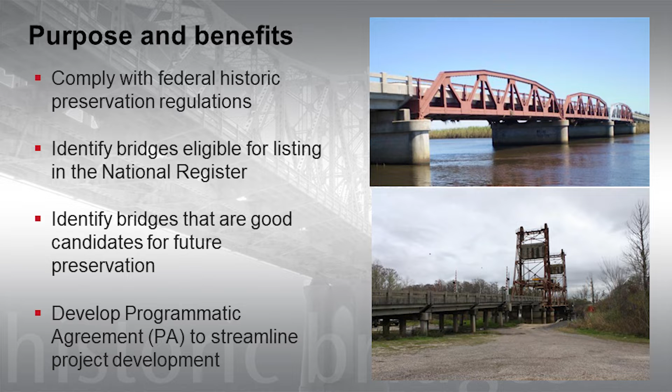What is the purpose and benefit of it all? Ultimately, it allowed us to deal with our nearly 4,600 bridges that were eligible to be historic, being 50 years and older. This agreement allowed us to comply with federal regulations, identify the bridges that could be on the register, and figure out which ones are good candidates. We had a methodology we used to select the bridges that ultimately ended up being top priority.

Ultimately, it streamlined our ability to do work on our structures. These are the project steps we went through: we did a historic context study in 2012, organized and analyzed all the bridges in that time frame, did field studies, and evaluated the register. The most important step was identifying bridges' preservation potential, using a specific methodology. Ultimately in 2015 we executed and signed the agreement with all parties, so it's been in effect now for about 6 years.

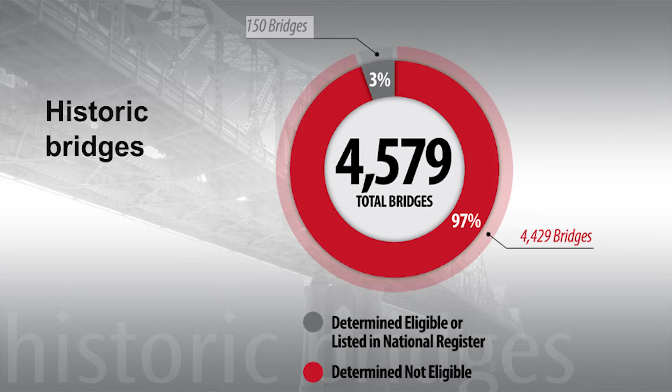Part of the methodology was to figure out what all the different bridge types are. Basically, in a nutshell, we select one bridge in each type that's going to be maintained in really good condition in perpetuity. That's the crux of the agreement. All of the others can be worked on, rehabbed, or replaced. There is a commitment on the department's side to fund and keep those bridges as a top priority.

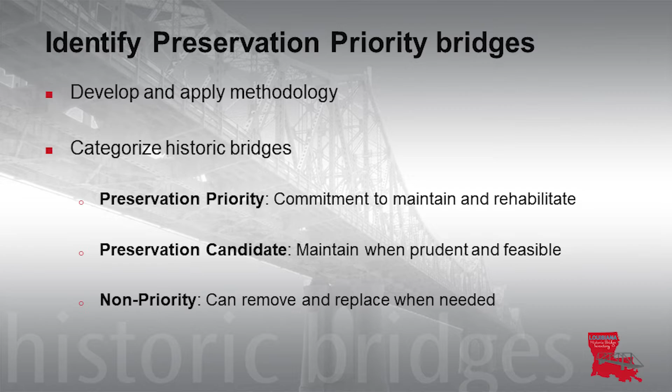One of the next steps was to identify the preservation priority bridges, develop a methodology, and categorize those bridges. The three categories we came up with were: preservation priority, the most critical bridges in our agreement, which cannot be replaced and have to be preserved and kept in good condition; preservation candidates, the next tier, which can have major rehab done on them; and non-priorities, which can be fully replaced when needed.

We used some of the NBI data to create 5 categories that went into a formula that helped us grade our bridges. Basically, we gave them a condition score, which could be anywhere from 0 up to 93. It doesn't have to add up to 100. Engineers generally understand that, but explaining it to other people doesn't always work. Here are the NBI items we used in creating these 5 different factors, which I'll talk about in more detail.

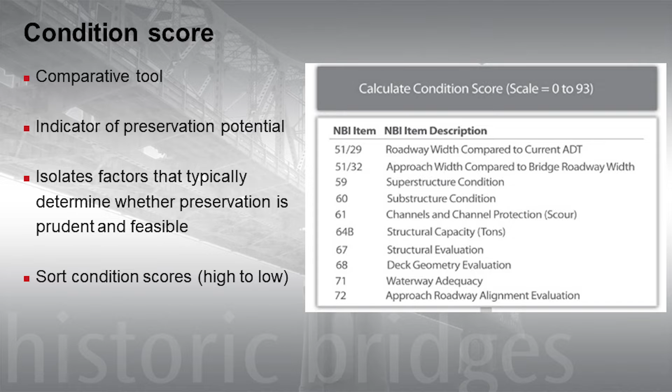It's a comparative tool. It allows us to use good data that already exists, and it indicates preservation potential and isolates factors that could create problems. We sorted condition scores from high to low, and this is how we selected the bridges that would be our top priority. So those NBI factors go into these 5 different items that make up the condition score.

Rehabilitation is the first one. Basically, is it in good condition, or can we do some sort of rehab to get it into good condition to where it would be a good candidate? Geometrics is next—what do the geometrics look like on the bridge? Does it meet current standards? A lot of them don't, but some did, and that was a factor.

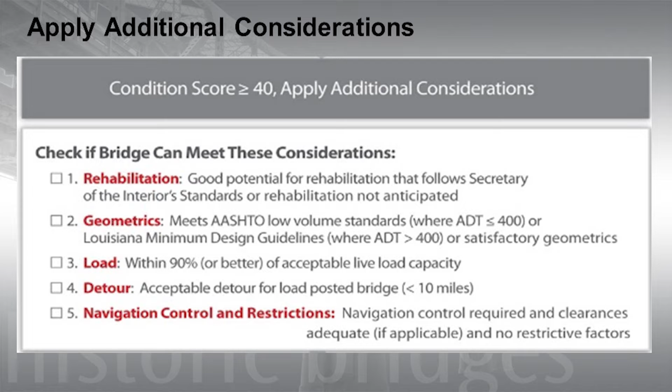So we applied the AASHTO standards. For low ADTs, we used the minimum guidelines that are allowable. The load capacity of the bridge—could it maintain 90% of the acceptable load capacity? Detour—how long is the detour? Our criteria was that it needed to be less than 10 miles. And then navigational control and restrictions was the last one. I'll go through each of these items in a little more detail.

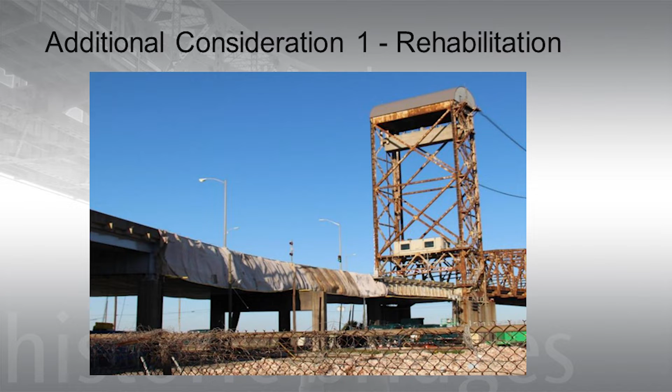So rehab—again, this is one of the bridges currently being rehabbed. By the time this rehab project is done, it would be a good candidate for being a preservation priority. This is ultimately one of the bridges that ended up on there. The other question is, if it's not in good condition, can it be made in good condition reasonably?

The second factor was geometrics—what sort of geometrics were involved in the bridge, and did it meet current AASHTO conditions? Do I have a 4-lane highway coming up to a 2-lane bridge?

The third factor was the load capacity of the bridge. Basically, can it carry 90% of the AASHTO HS 20-44? You could still have a load-posted bridge like this and have it qualify, but nothing less than this—no load posting less than this.

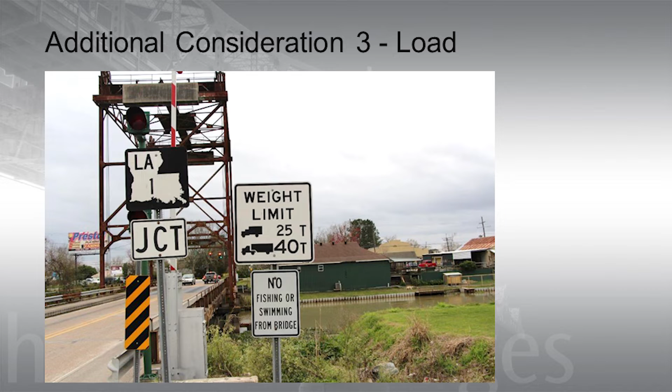The fourth condition is the detour. It's pretty simple and straightforward—it's one of the NBI items. Is it less than 10 miles?

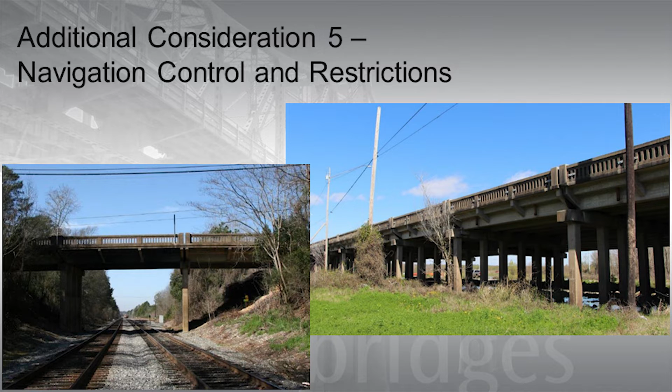This one was a little trickier—the navigational control. Of course, a lot of our movable bridges have navigational controls. Obviously, there's horizontal and vertical clearances, and as long as the bridge met those conditions, they were considered okay. You could have additional controls, such as railroads or other things, that could make rehabilitation not feasible. So all those things have to be considered.

They're all put into a formula, and we rank them from high to low. I'll note that the movable bridges, which we have the most of in the country, made up the largest percentage of bridge types in this program. Ultimately, this was the result of running all 4,600 bridges through the formulas, with 122 qualifying. I'll go through a quick example of each: preservation priority, preservation candidate, and non-priorities.

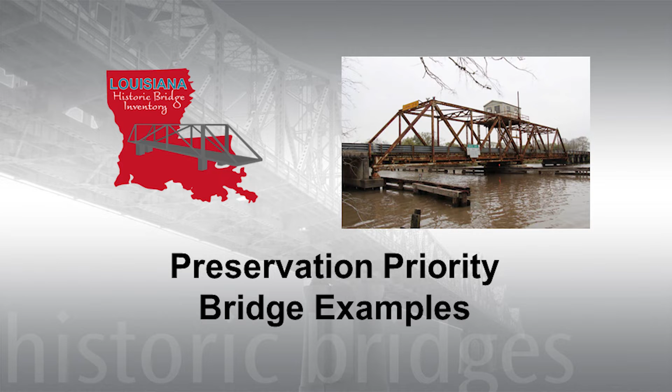This is a unique movable bridge with the operator house on top—that's very unique. Most of the time, the operator house is somewhere on the side. If you go too fast, this guy's going to get dizzy. So it needed to meet the preservation priority—it needed to check all 5 of those boxes.

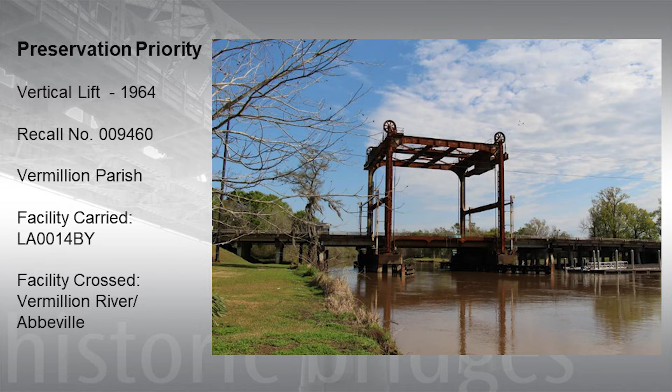Here's an example of a bridge. It's in the lower part of our state, down in Vermilion Parish. It's a lift bridge, and it's one of our preservation priority bridges. It looks rusty here, but it's been rehabbed since then. It was a preservation priority, built in '64. Here's some of the data on it—it checked all 5 of the boxes.

Conditional score was 66, so our threshold to make the preservation priority list was 40. You had to have a condition score of 40 or greater. Anything less than that wasn't even considered.

Preservation candidates, the next tier down, are bridges that can only be rehabbed, not replaced. There are very few of these, but they're included in the 122.

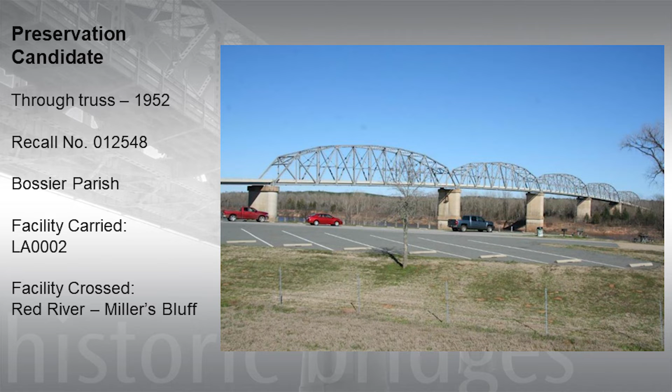Here's another example of a candidate - a truss bridge up in the middle part of our state. It didn't check all the boxes, particularly the geometrics. That's why it's a preservation candidate and not a preservation priority. A truss bridge like this, you're not going to fix the geometrics without replacing it. It's still a candidate for rehab, but not for replacement.

Non-priority bridge examples scored 40 or less. These are structures that can be replaced. Out of those 4,600 bridges I referred to earlier, 122 will not be replaced, but the non-priorities are the 4,600 minus the 122. This allows us to move forward without significant issues with Section 106 or other historical federal guidelines.

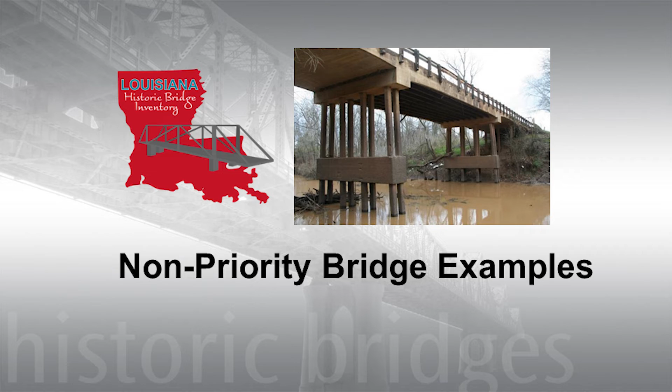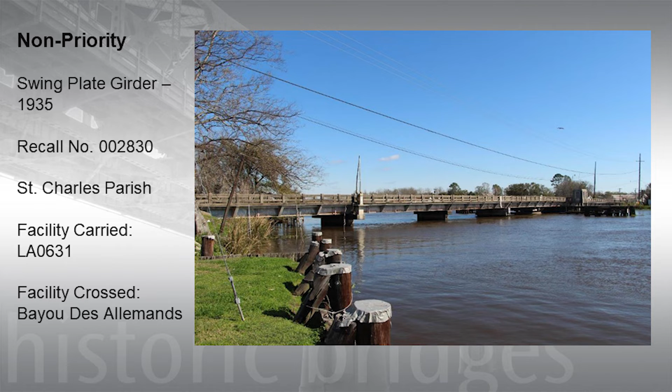This is just an example - a bridge down in the lower part of the state, and it's not in good condition. If they were in poor condition, they were going to get a lower score on some of those factors. The only box this one checked was that the detour was short. Everything else didn't work.

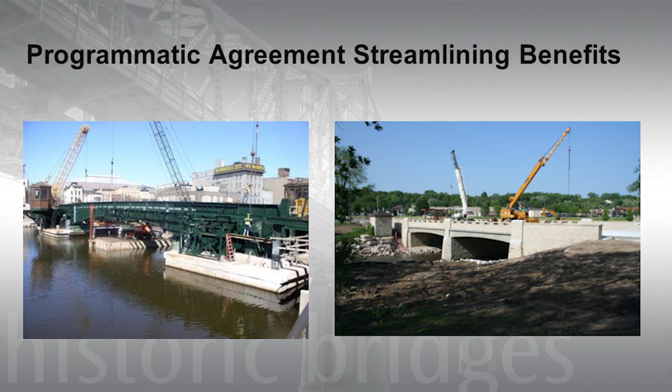What were the benefits of this agreement? Again, we only really are dealing with about 3% of our bridges that we have to handle with kid gloves.

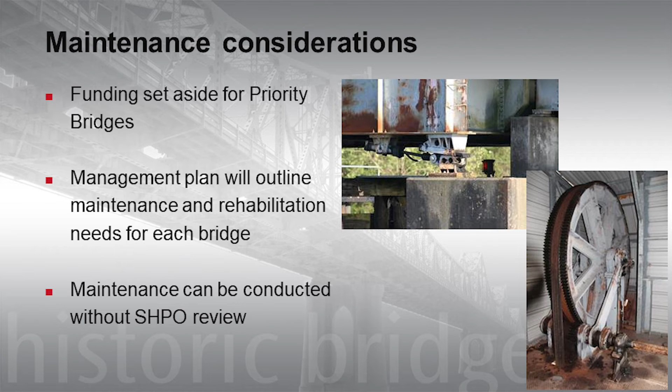Part of what's in the agreement is each bridge listed as a preservation priority or candidate has its own maintenance and preservation plan that's in the agreement, and it spells out what can and can't be done to the bridge. I kind of flew through that.

All that works really good until something catastrophic happens - a ship hits one of your bridges, or like during Hurricane Ida three months ago, we had 150 mile an hour winds and a 15-foot tidal surge that took out one of our preservation candidate bridges, just put it in the water. Mangled it up pretty good, and it was one of our few bridges that is one-way in, one-way out.

It created a nice little mess. We ended up doing a bunch of weird things, like putting in a military barge bridge, and could probably do a whole presentation on just that incident.

If there are any questions... Hey, I'm from Texas, so I'm an interloper like David.

I had an opportunity to see an earlier version of this presentation that David did about 6 years ago, and frankly it seemed a little far-fetched to me that we would convince SHPO and the Historic Commission to buy off on it, but we took this process back and they were actually very receptive to it. So we did something similar with all of our trusses. Now in Texas, we got down to a list of about 29 trusses that we promised to maintain for all time, and they'll leave us alone on the others.

I really just wanted to put a plug in. I know how difficult it can be to work with the environmental side and the historic side of people, but I didn't think in Texas they would buy off on it - they were actually very receptive to this concept.